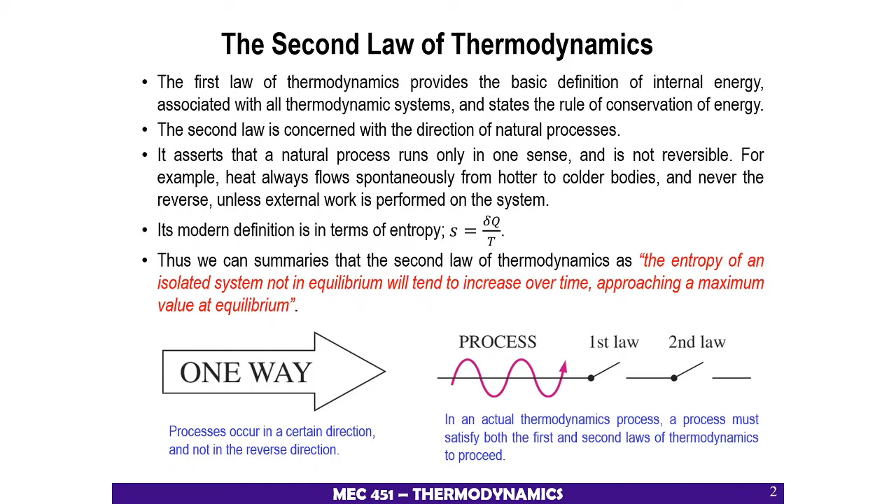So in an actual thermodynamic process, a process must satisfy both the first and second laws of thermodynamics to proceed. In other words, every process obeys the first law and the second law. The second law of thermodynamics, major uses of the second law: the second law may be used to identify the direction of the process.

The second law also asserts that energy has quality as well as quantity. The first law is concerned with the quantity of energy and the transformation of energy from one form to another with no regard to its quality. The second law provides the necessary means to determine the quality as well as the degree of degradation of energy during a process.

The second law of thermodynamics is also used in determining the theoretical limits for the performance of commonly used engineering systems such as heat engines and refrigerators, as well as predicting the degree of completion of chemical reactions. So this is an example of the second law.

In the first figure, a cup of hot coffee does not get hotter in a cooler room. Basically, the hot coffee loses heat, which is released to its surroundings, and over time the hot coffee becomes warm, and eventually it becomes colder.

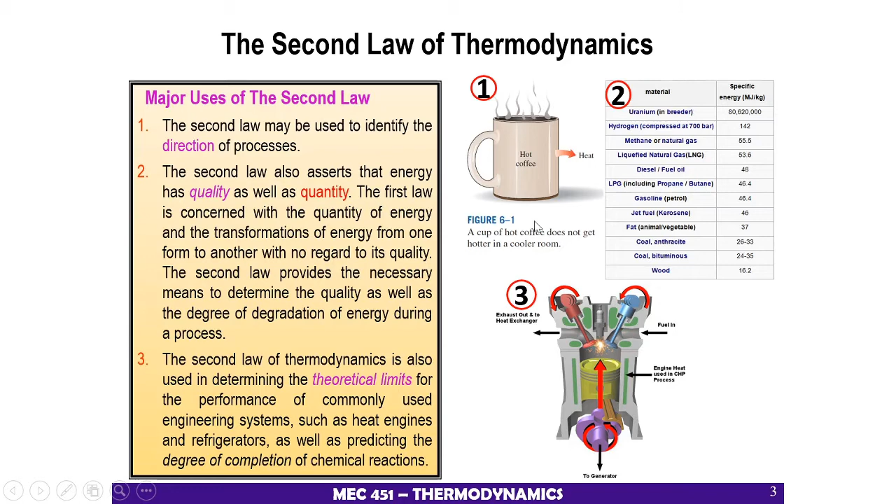Thermal energy reservoir. In the development of the second law of thermodynamics, it is very convenient to have a hypothetical thermal energy reservoir, or just a reservoir: a body with a relatively large thermal energy capacity, or mass times specific heat, that can supply or absorb finite amounts of heat without undergoing any significant change in temperature. That we call a thermal energy reservoir.

We have two types of thermal energy reservoir. First, we call it a source. Second is the sink. A source supplies a finite amount of heat without undergoing any change in temperature. The sink absorbs a finite amount of heat without undergoing any change in temperature.

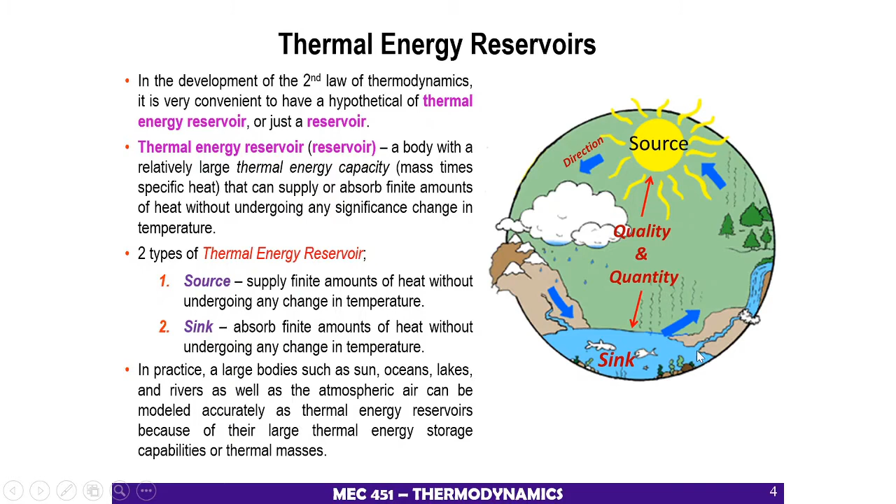So, in practice, large bodies such as the sun, oceans, lakes and rivers, as well as atmospheric air, can be modeled accurately as thermal energy reservoirs because of their large thermal energy storage capabilities or thermal mass. So something like this. This is your source, the sun. And this is your sink. The source will supply the heat. The sink will absorb the heat. So this is an example of a reservoir.

Heat engine. The thermal energy reservoir, or just reservoir, can simply be modeled as a heat engine. What is a heat engine? A heat engine employs a range of methods to apply the heat and to convert the pressure and volume change into a mechanical motion. For example, convert heat to work.

Heat engines involve four processes to convert heat into work. So the first is they receive heat from a high temperature source, for example, solar energy, furnace or nuclear reactor. Number two, they convert part of this heat into work, usually in the form of a rotating shaft.

Number three, they reject the remaining waste heat to a low temperature sink, for example, atmosphere, river, and other absorbent material. And number four, the last, is they operate on a cycle. So heat engines and other cyclic devices usually involve a fluid to and from which heat is transferred while undergoing a cycle. This fluid we call a working fluid.

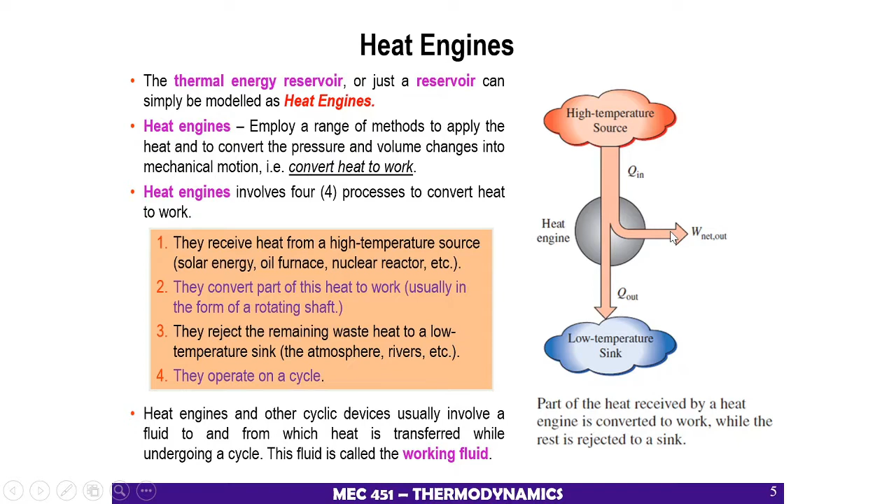So this is the example of a heat engine. We have a high temperature source, and we have a sink at a much lower temperature. In the middle we have a heat engine. Heat is supplied, Q in. This is Q out, which we can describe as heat loss. And this is the net work output. Examples of everyday heat engines include the steam engine.

For example, most of the world's power plants use steam turbines, a modern form of steam engine, and the internal combustion engine, gasoline, which is a petrol engine, and the diesel engine in an automobile or truck. The work producing device that best fits the definition of a heat engine is the steam power plant, which is an external combustion engine.

We have a boiler, a pump, a condenser, and a turbine. The boiler receives heat from our source, such as a furnace that supplies the heat, and this is your working fluid. It moves the turbine, the turbine produces power, and the hot fluid will be cooled in a condenser and then pumped back to the boiler.

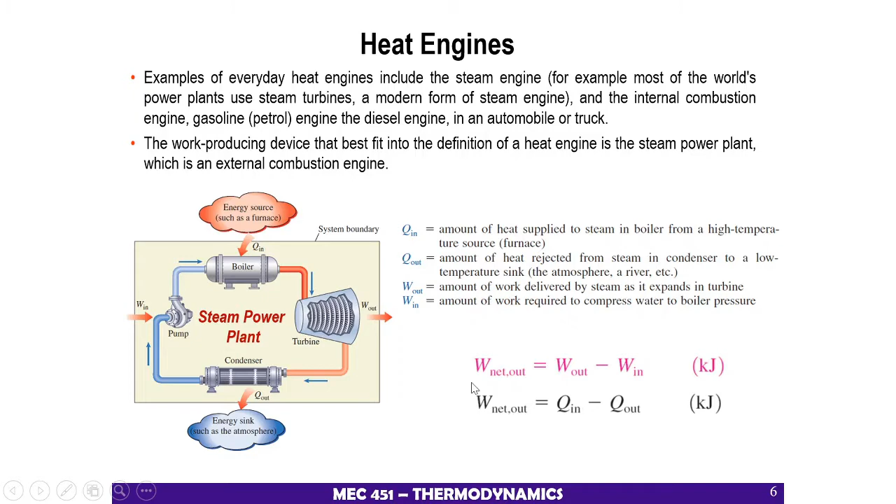So the net work is work out minus work in. In this example, we have work out from the turbine minus the pump work. Also, the net work is the Q in supplied minus Q out. So that is also the net work.

Thermal efficiency. Based on the cycle of the steam power plant and the third major use of the second law of thermodynamics, the performance of the power plant can be measured. This measurement is called thermal efficiency, and mathematically the efficiency is your desired output divided by your required input. Normally the output we need is work divided by your heat input, so the net work output divided by heat in.

Net work is Q in minus Q out, heat in minus heat out. So we can substitute net work into this equation, giving Q in minus Q out divided by Q in, and then cancel out. The thermal efficiency is 1 minus Q out divided by Q in, the same as 1 minus QL over QH. As we assume Q in is the higher side, we replace Q in with QH, Q hotter, and QL is Q lower. It's the same methodology.

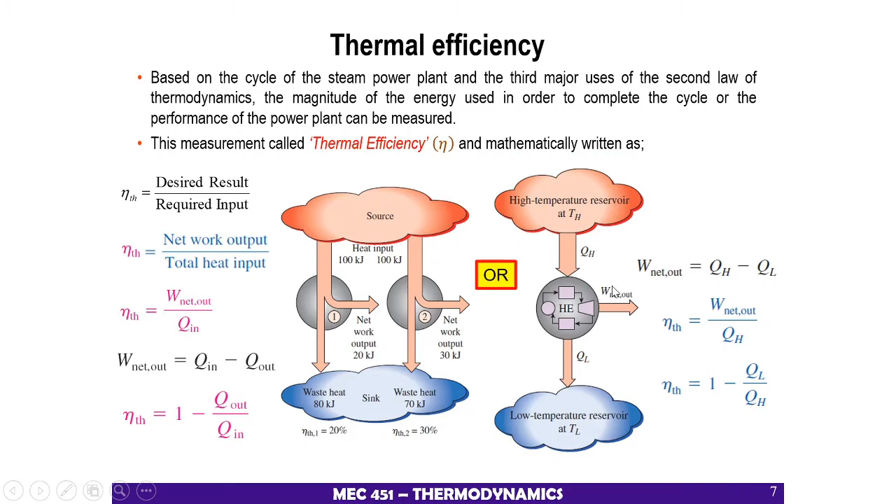Kelvin Planck statement. The Kelvin Planck statement states that it is impossible for any device that operates on a cycle to receive heat from a single reservoir and produce a net amount of work. No heat engine can have a thermal efficiency of 100%, or for a power plant to operate, the working fluid must exchange heat with the environment as well as the furnace. That is the third major use of the second law of thermodynamics.

So basically the impossibility of having a 100% efficient engine is not due to friction or other dissipative effects. It is a limitation that applies to both idealized and actual heat engines. So in actuality, the efficiency cannot reach 100%.

So a heat engine that violates the Kelvin-Planck statement of the second law has no waste heat. Which means that if you have a thermal energy reservoir supplying 100 kilowatts of heat to the heat engine, the net work output is 100 kilowatts, no heat loss. So basically this is a heat engine that violates the Kelvin-Planck statement.

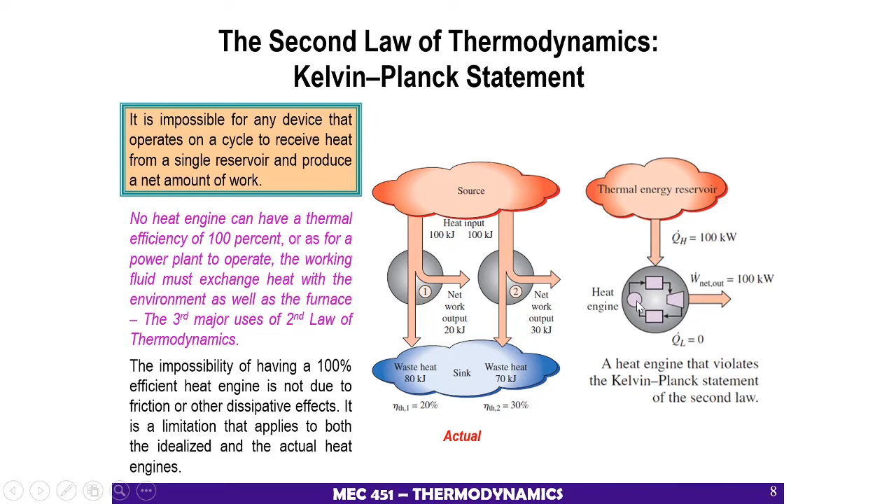Sample problem 4.1. A steam power plant produces 50 megawatts of net work while burning fuel to produce 150 megawatts of heat energy at the high temperature. Determine A, the thermal efficiency of the cycle, and B, the heat rejected by the cycle to the surroundings.

Alright, so 4.1. Basically here we have a steam power plant producing net work. Given directly, work net is 50 megawatts, while burning fuel, Q high is 150 megawatts. So refresh back, your work net is Q high minus Q low.

So the thermal efficiency of the system is work net, the desired output, divided by QH, your input. This is equivalent to 1 minus Q low over Q high. We use this equation because we have all values. So we have 50 megawatts over 150 megawatts, which gives 0.333, times 100%, we got 33.3%.